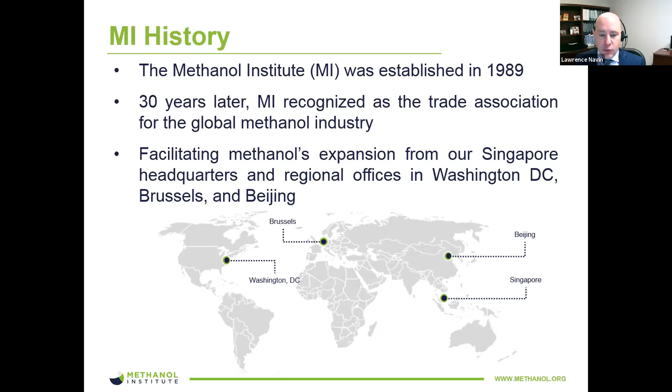Here you see a graphic with an overview of methanol production and demand. Methanol has a number of traditional feedstocks, as you can see, natural gas and coal, and also biomass and renewables, which encompass a large number of potential feedstocks, and which we'll cover in more detail in just a moment.

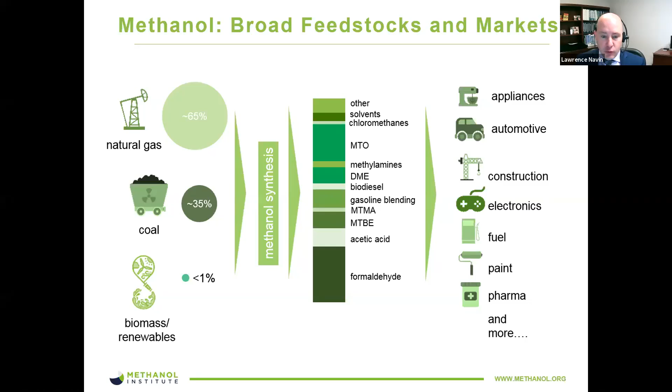As you can see from this graphic, the roughly 80 million metric tons of methanol that was sold globally in 2018 has a wide array of uses, as a chemical building block in pharmaceuticals, electronics, and appliances, to energy and fuel uses, which encompassed over 40% of total 2018 methanol demand. In fact, from 2009 to 2018, direct methanol fuel blending has increased at an annual rate of well over 20%.

In 2018, the Methanol Institute decided to commission ATA Insights to produce a report for us on renewable methanol. This report is intended to serve as a primer on renewable methanol and provides a great overview of this increasingly important sector of the methanol industry. Highlights of the report include applications and uses of renewable methanol, information on renewable methanol production, case studies on renewable methanol companies, BioMCN, Enerkem, and Carbon Recycling International, and more.

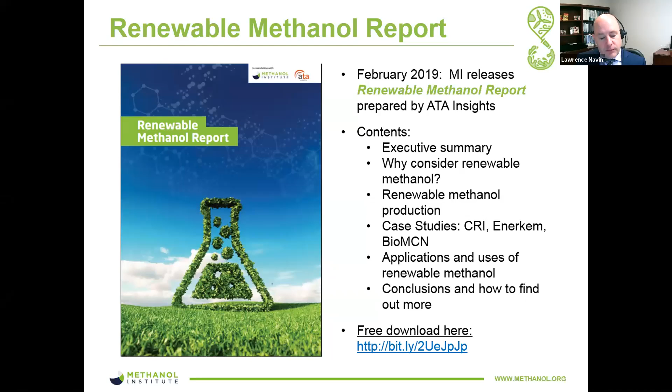As I had noted previously, there are numerous pathways available to produce renewable methanol. Feedstocks include agricultural waste, which yields a great deal of biomass that can be converted into biomethanol without interfering with food prices or availability or encroaching on agricultural land.

Forestry residues: a large amount of residual biomass, such as leaves, branches, needles, and wood chip, is produced in the process of harvesting trees. These byproducts can be used as a feedstock for producing biochemicals such as renewable methanol.

Municipal solid waste: using municipal solid waste to produce renewable methanol creates value from unrecyclable garbage and relieves pressure on landfill sites. Two-thirds of municipal solid waste is either dumped in landfills or incinerated. A significant portion of this waste could be diverted towards producing sustainable chemicals, including renewable methanol.

Carbon dioxide: around 32.5 billion metric tons of CO2 were released into the atmosphere in 2017 alone. With current technology, it is possible to capture CO2 from the atmosphere and from industrial exhaust streams. Power plants, steel and cement factories, and distilleries, among others, produce carbon dioxide that could be used as a source to produce renewable methanol. Lastly, here on this slide, we have renewable hydrogen.

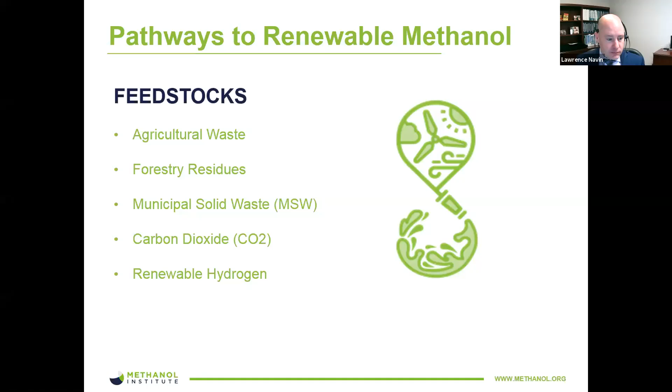You can see here in the figure shown various renewable methanol production processes, which result from the use of different feedstocks.

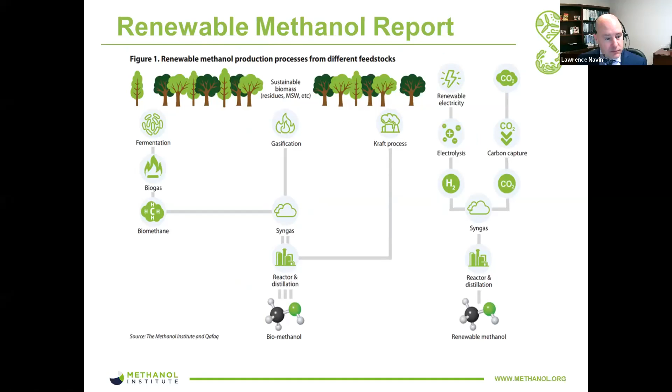This slide shows the growing constellation of companies involved either in commercial, renewable, or low carbon methanol production, and also those advancing through the research and development stages of renewable methanol production.

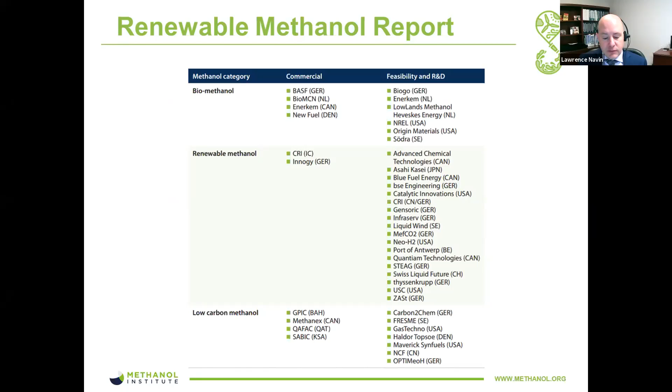And both of those previous graphics, as well as the one I'm showing now, are available in the report as well.

This slide, using data supplied by the European Environment Agency, shows the share of greenhouse gas emissions in 2015 arising from each type of transport. As you can see, road transport and maritime are two of the largest categories.

Methanol, and by extension renewable methanol, shows great potential as both on-road and marine fuels, both for today and the future.

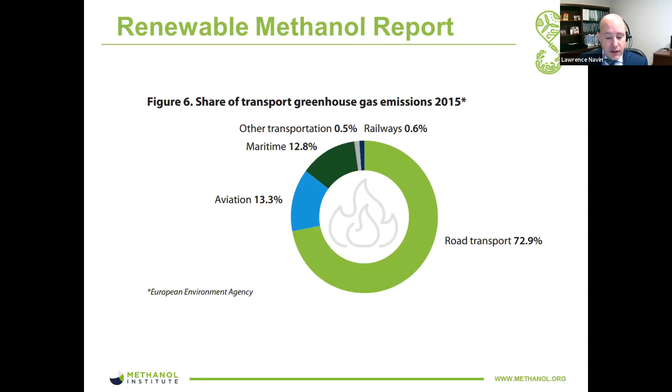As I had noted before, energy and fuel uses already encompass 40% of total methanol demand.

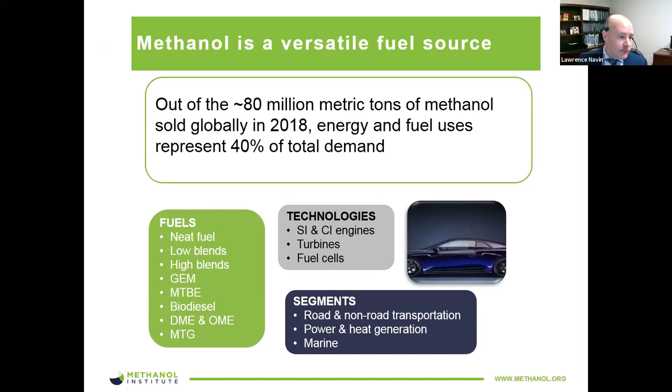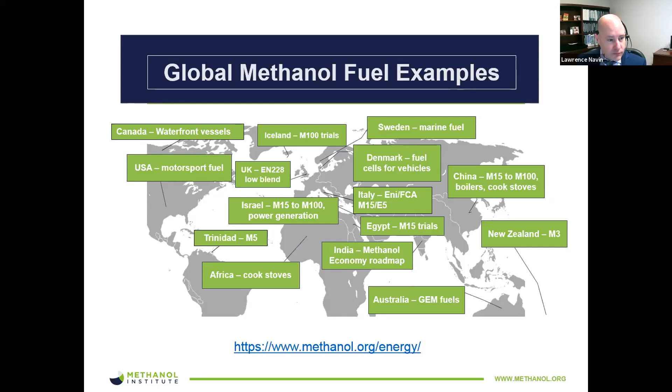Additionally, the combustion of pure methanol produces no sulfur oxides, low nitrogen oxides, and no particulate matter emissions.

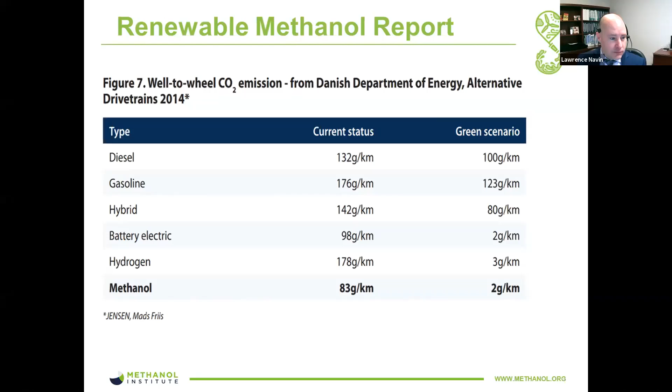One last thing that I would like to briefly touch on here, and Carlos mentioned this in the opening to the webinar, are the potential synergies available when combining variable renewables and renewable methanol.

In recent years, solar photovoltaic, hydro, and wind have grown to account for a significant part of the energy mix in many parts of the world. These resources provide clean and affordable electricity, but peak yield may not match peak demand.

This scenario can lead to wasted energy, as transmission system operators may disconnect the renewable resource to safeguard the integrity of the electric grid. Instead of being wasted, this electricity could be harnessed to generate clean power or as a renewable fuel for cars and ships.

You will learn more about this exciting potential from other speakers later in the webinar.

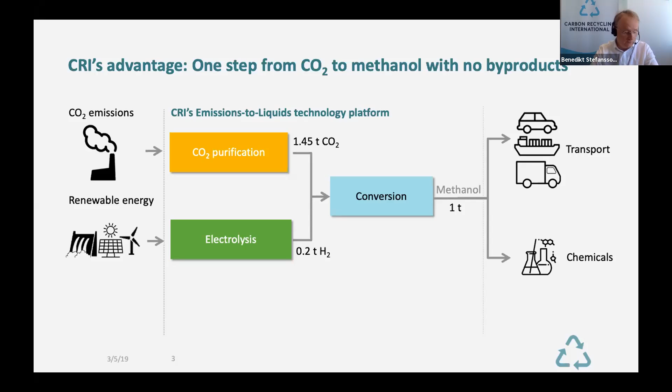As I mentioned earlier, the hydrogen could also come as a byproduct from another process. In that case, you often end up with a diverse stream of gases where you have to extract the pure hydrogen, and then you have exactly the same downstream process.

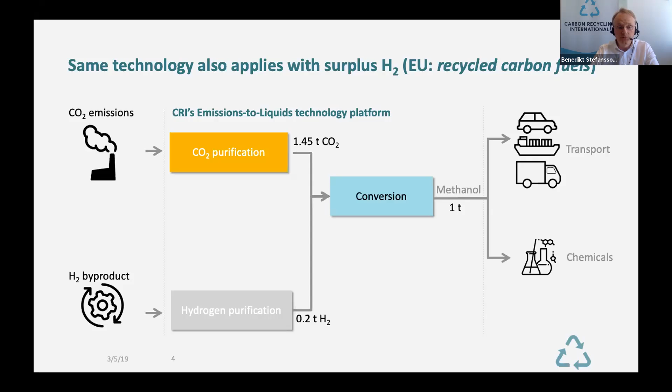We named it after George Olah, the famous chemist who won the Nobel Prize in chemistry, and also wrote a book right around the same time as we were launching the company called The Methanol Economy, in which he describes essentially how methanol can be an essential carrier for energy, both as a chemical feedstock and also as a fuel.

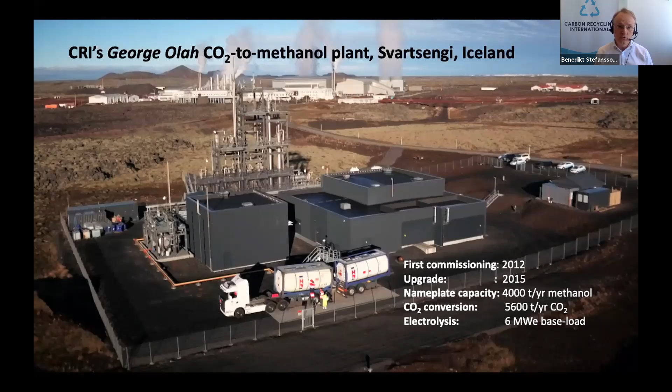But as I was describing in the earlier diagram, this technology, of course, works with any source of CO2. So we have gone from essentially developing this at a very small lab scale until we financed and implemented the industrial scale plant in 2012, then upgraded it in 2015.

Currently, we're working on projects in Europe, which are actually of a smaller vintage, projects where you will only produce approximately 1 ton per day, but they are to demonstrate that we can operate this type of chemical plant with intermittent wind power as well as a totally different stream of energy from the steel gas, blast furnace gases. And these two projects are going to be implemented in 2019 and 2020, one in Germany and the other one in Sweden.

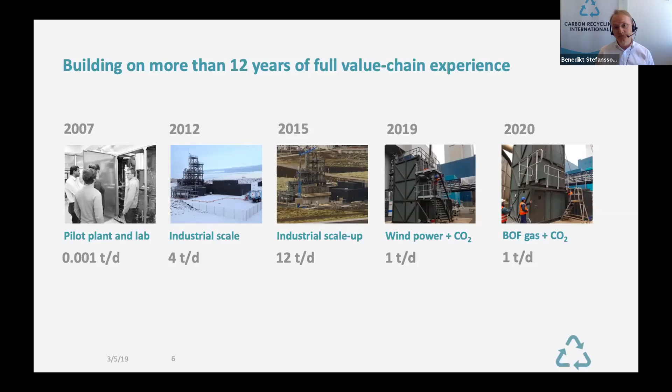Now, why is this process considered to be low carbon intensity or carbon neutral? We have to, of course, think about this in the context of what we're doing today, the business as usual, in which we have a lot of industry that emits CO2 into the atmosphere.

We rely in our transport system for 99% of the energy on oil-derived products. And so the oil industry has its own upstream emissions, and of course this carbon from the earth is then combusted in the vehicles and emitted into the atmosphere and enters as a net addition.

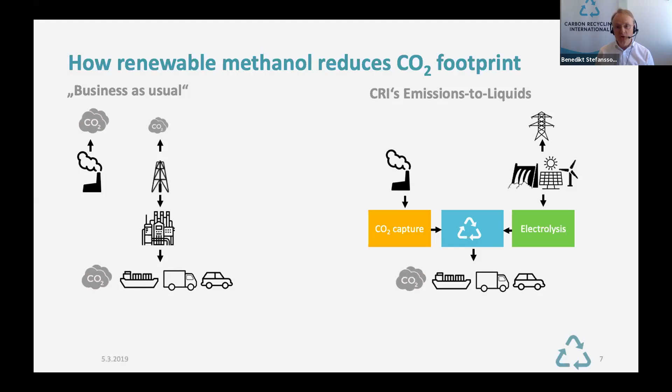Now, if we then do this instead with our process, we can take that CO2 that would otherwise have been emitted by the industrial emitter, convert that into an alcohol, the methanol, utilizing low carbon intensity or zero carbon intensity energy sources. And although the vehicles that use the methanol are combusting it, we have essentially created a net reduction in CO2 net emissions for the system.

So putting this more into numerical values, according to, for example, European regulation, we should compare what we are doing, our pathway, with the baseline, which is gasoline or diesel. And in that case, if we convert everything into tons of oil equivalent, we would be reducing the carbon intensity by up to 4 tons of CO2 per ton of oil equivalent.

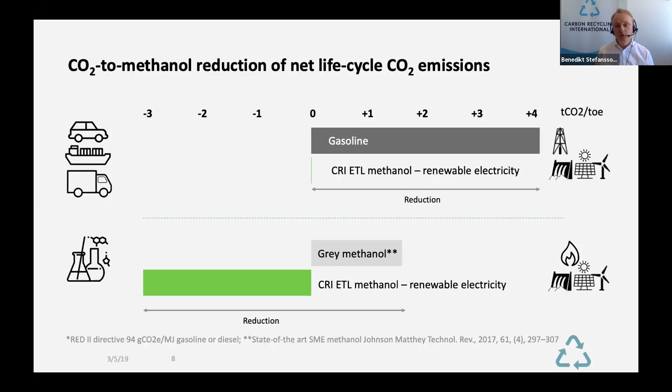And in chemicals, we are essentially sequestering the CO2, and we have a similar or even larger reduction depending on what comparator you use.

I wanted to end up by basically giving you a quick overview of how we think about the economics of this and the economic drivers behind this technology. So obviously we are transforming an energy source into another energy carrier, that is the methanol. So everything is driven by the price of the energy source, the price of the hydrogen essentially.

Here, what I'm showing you is essentially what we saw as the product value in the last year or so, which is the blue region on this larger graph. The line that goes diagonally up from the left to the right is essentially representing the full conversion cost of the underlying electricity into the product. So it's the transformation and the other operating costs.

And so what is above that diagonal line is basically the returns that can be accrued to capital. And on the right-hand side, I'm showing you basically where we're deriving the product value from. That is the green premium that is embedded in current biofuels, and which then drives the value to the buyer.

And the lower diagram on the right-hand side shows you electricity prices going forward for the next 5 years in the Nordic region, which represents the largest supplier of renewable electricity today in the Nordic countries, Norway, Sweden, and Denmark. And we can see that after basically a spike in electricity prices last year, they're now trending back to about 30 to 32 euros per megawatt hour. And that is what is giving us that value on the diagram that I'm showing you of production costs of 42 euro cents per liter of methanol, and a product value that is well above that, basically looking at last year.

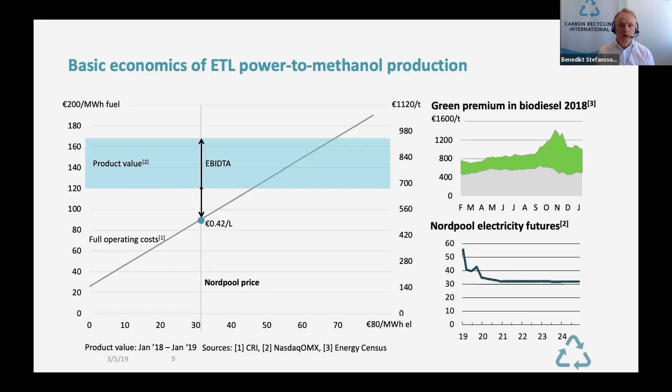So what we're seeing basically is that we can push down the cost of production, both in terms of CapEx and also by increasing efficiency in the process, that especially here in the European market, we'll be increasing targets for low carbon intensity fuels, a cap on crop-based biofuels, basically increasing the demand for these new processes, and that other alternative solutions, especially in transport, such as battery-operated vehicles, are limited to light duty and low range. So we see a lot of demand continuing for liquid renewable fuels.

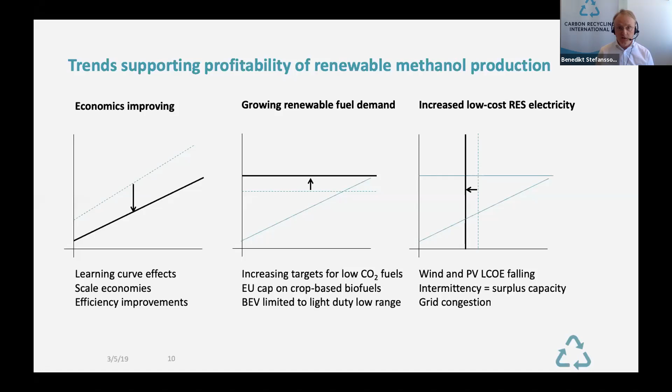And also energy prices should be coming down. The levelized costs of wind and photovoltaic are falling. Intermittency basically means that you have to invest in overcapacity. This was alluded to before. And there is also going to be congestion on the grid, which means that there will be surplus energy that can be used and transformed into fuel or energy carriers.

So we have the product ready. We are compatible with existing infrastructure. As a company, we now have demonstrated the solution and are ready to scale up and deliver larger systems. And I think what is important also is that we will stay competitive with other advanced fuel pathways. That is, transformation of biomass into fuel is going to be also quite expensive. And that is basically our target, to compete with those and be better.

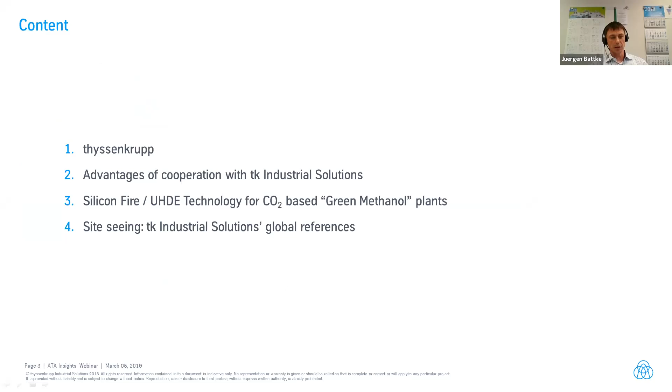Okay, in this presentation, I would like to give a short glance at ThyssenKrupp, my company. I want to explain the advantages of cooperation with ThyssenKrupp Industrial Solutions. I want to introduce the Silicon Fire technology for CO2-based green methanol plants. That means the combination of electrolysis and methanol synthesis based on CO2 and hydrogen. And then I have a last slide providing an overview of our global references, which are the plants we have built in the last 100 years.

Okay, ThyssenKrupp itself is divided into business areas, and here in the blue box we have the business area of industrial solutions. This industrial solutions is responsible for chemical plant technologies and engineering, and we are quite big, so we have more than 21,000 employees globally. ThyssenKrupp as a whole had sales of more than 42 billion euro last year, and globally we have more than 160,000 employees in our network.

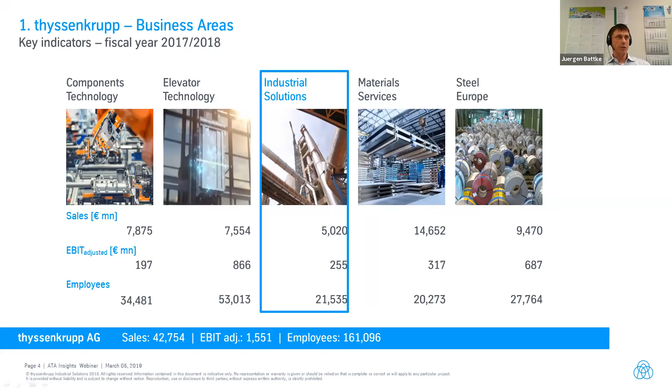ThyssenKrupp Industrial Solutions, the business area itself, is subdivided into different business units, and on this slide I put 4 business units in the upper line. It's the electrolysis technologies, the business unit for fertilizer and syngas technology, which is the owner and co-owner of the Silicon Fire methanol technology. Then we have the business unit of industrial specialties. They are dealing with gas cleaning technologies. And we have here the cement technologies. Why did I put these 4 business units in one line? It's just to give you an example that we could actually provide all solutions for projects related to green methanol.

I'll give you an example. For instance, if you have a cement plant, our colleagues from the business unit cement technologies could convert this cement plant to an oxy-fuel process, and this cement plant will then produce flue gas very rich in carbon dioxide. Our colleagues from the business unit industrial specialties could further clean up this carbon dioxide, because the methanol synthesis needs pure carbon dioxide.

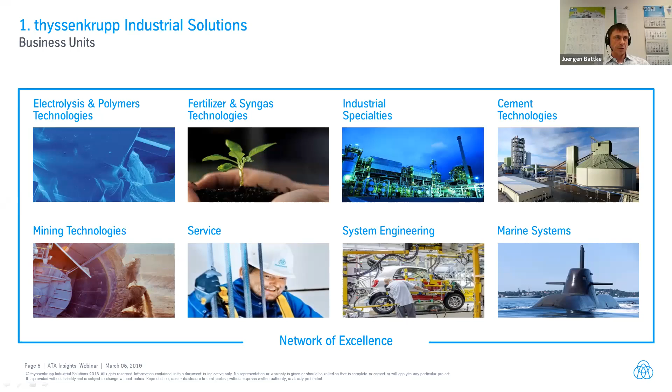And of course, this oxy-fuel process needs pure oxygen, and this could be produced by the electrolyzer, and the electrolyzer, of course, is producing hydrogen too. And then we have everything complete. We have pure carbon dioxide, we have pure hydrogen, and we could convert it by our methanol synthesis, which is coming from the business unit fertilizer and syngas technologies.

So this brings me to the advantages of the cooperation with ThyssenKrupp, because we think we are the right partner for a project, because we can provide solutions for all different phases of a project like building a methanol plant. We can deliver all kinds of engineering.

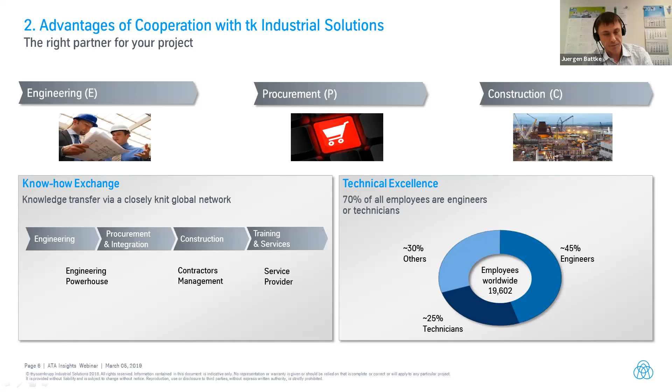That means all the licenses, basic and detail engineering, the EP packages, or the full EPC execution is coming from one single source. And we can do that because we are the owner or the co-owner of the alkaline water electrolysis and the SLF/Uhde methanol technology. So we have everything in place. That means there are no gaps between the different technologies. There are no interfaces with other third parties.

And this allows us the shortest possible workflow so we can minimize the overall project schedule, and actually project duration means sometimes project money or project cost. Of course, we have a track record for delivery in time and in budget. So we are in a position to provide the full competence for all project phases.

So we can start with very early project phases like the project development. We have a dedicated department for project development. We would be happy to support the customer to develop this project. We can prepare feasibility studies. We can elaborate basic engineering, detail engineering. We can do the procurement, construction of the plant.

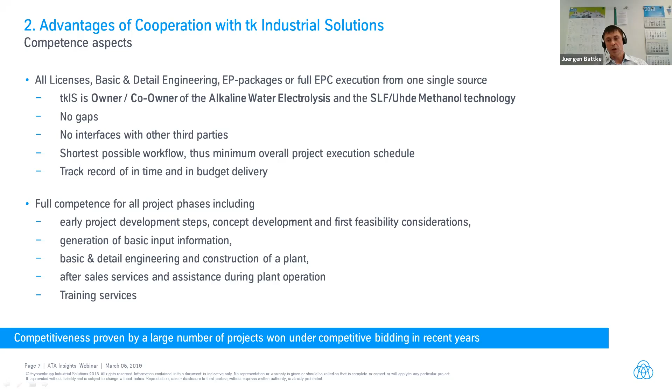And I think that's pretty important. We also have a dedicated service business, so we can provide this after-sales services and assistance during the plant operation or operation of the plant itself, build and operation.

Now introducing our silicon fire technology for green methanol plants. And actually everything started with a business idea for small scale plants. The idea was, or one of the ideas was, that we want to store green power as a green fuel. And the green fuel should replace the fossil gasoline. For this particular project, we considered a decentralized production in direct proximity to the power plant substation. So we have no transmission losses and no transmission fees.

The customer should get revenue from CO2 compensation. The production should be independent from oil and also independent from oil price cycles or fuel imports. And I think this is quite important, and that the production of methanol from hydrogen, which is coming from power, and carbon dioxide, should increase the economics of the new renewable power generation.

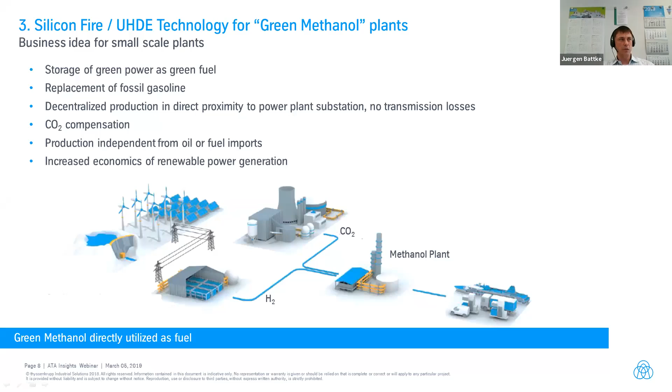For that, we have optimized our methanol synthesis for small and medium capacities. If I talk about small capacities, what is the meaning of small capacities here? I have put down 12 metric tons per day of methanol. That's about the size of the very nice plant of Carbon Recycling in Iceland. And this would correspond to an electrolyzer power consumption of about 5 megawatt.

But of course, we are also targeting bigger capacities. We call it a medium capacity. For instance, something about 290 metric tons methanol per day, which would require about 120 megawatt electrolyzer.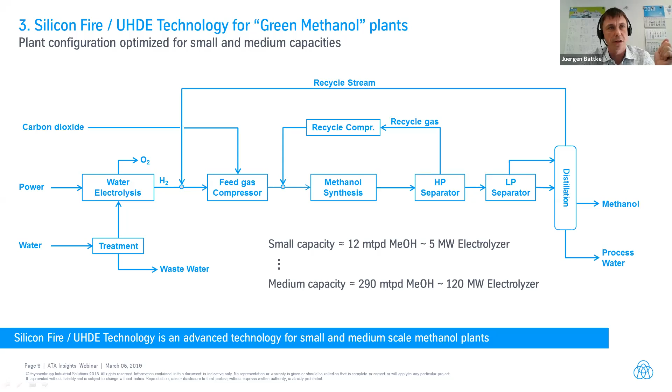And for this small plant, we are intending to have one distillation column because this is sufficient to upgrade the methanol to fuel grade methanol, which is actually about 99.5% purity or higher.

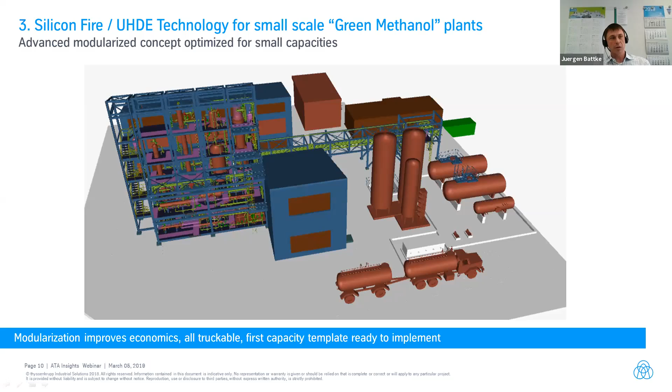In order to improve the economics of such a plant, we have modularized the process. And you can see on this sketch, the single modules are truckable, so we can pre-assemble them in the workshop, transport them easily to the site, and connect them. And for the entire plant, we did the engineering. We have a first capacity template ready. It's in our drawer, so we can start with the project immediately.

I want to close my presentation with a typical project characterization. It's a recent example of a small project in Europe. The plant type, of course, is methanol from carbon dioxide and hydrogen. Technology will be our own technologies, Silicon Fire methanol technology, and our alkaline water electrolysis. The production capacity, it's a small project, is 12 metric tons per day, fuel-grade methanol.

And a typical scope of supply for these kinds of projects is EPC lump sum turnkey. That means we are providing a fixed price and we're taking construction risk, etc. And due to our pre-configured plant concept, we have a very short implementation period. So we can start immediately if a customer wants to. And since we have our own plant layout engineering, we can consider architectural necessities in protected landscapes, like in Sweden, like in Switzerland, wherever in Europe it might be important.

And what I like is we started this project with a service agreement with temporary operation support, but the customer decided that he does not want to become a chemical plant operator. And so we are now negotiating a new agreement for full operation and maintenance. And this is feedback from a lot of power producers. They do not want to become a plant operator. And so ThyssenKrupp is offering the full operation and maintenance services.

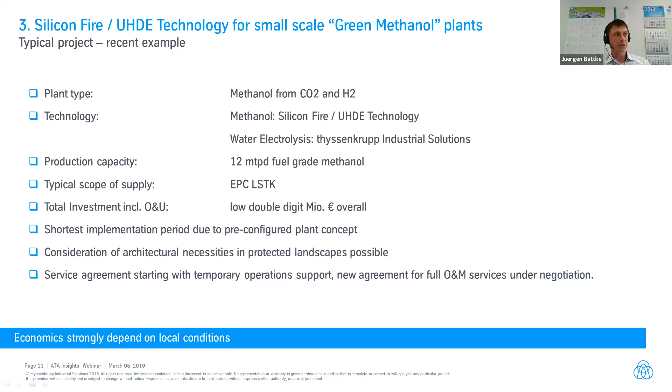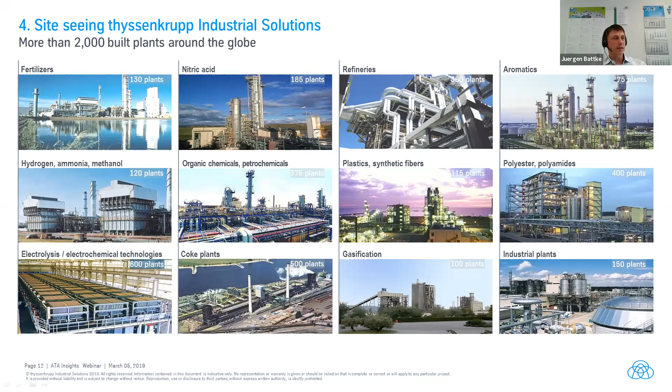Last slide, an overview of our plants we have built during the last 100 years. So we have built more than 2,000 plants. And next year we have our 100-year anniversary in our company here at our site in Dortmund. So we have fertilizer plants on the left side. We have hydrogen, ammonia, methanol plants. And of course we have plenty of plants for electrolysis and electrochemical technologies.